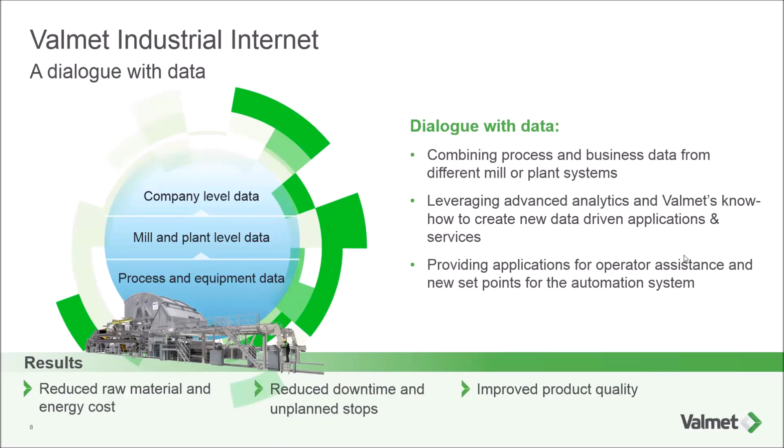So to reiterate in a nutshell, I'm going to be talking back to this quite a bit, but just because I think it's really important and it sets the tone for the whole presentation: the goal is we want to convert data into actionable information. That's the theme of what we are trying to do. Ward, could you move to the next slide, please?

So here I talk about the key elements of our industrial internet offering. At the core is the Valmet Performance Center. What this really is, I'm not sure how many of you have heard this term or seen the marketing material from us on the Performance Center. But really, it is a remote expert center where we provide remote support, remote monitoring, data analysis, and it also acts as a bridge between our Valmet customer experts, our Valmet process experts, and our customer experts.

As I mentioned, the theme of my presentation is converting data into actionable information. A key part of that is to give data context. So the next piece of our industrial internet offering is exactly that: the set of applications and suites we have built to give that data context.

Today, during the presentation, I'm going to focus on 3 specific applications. The goal is, as I mentioned earlier, we are using machine learning algorithms, which is a subset of AI, to build models to predict certain outcomes. I'll talk about that a little later on.

Another key component, to the right, is the Valmet Customer Portal. This is really a digital collaboration space between our customers and the Valmet experts. A lot of our applications and analytics, depending on the specific customer case, we may run in the cloud using Amazon Web Services. So essentially any customer with access to a web-enabled device has access to those applications and services through the Valmet Customer Portal. That's really the collaboration space.

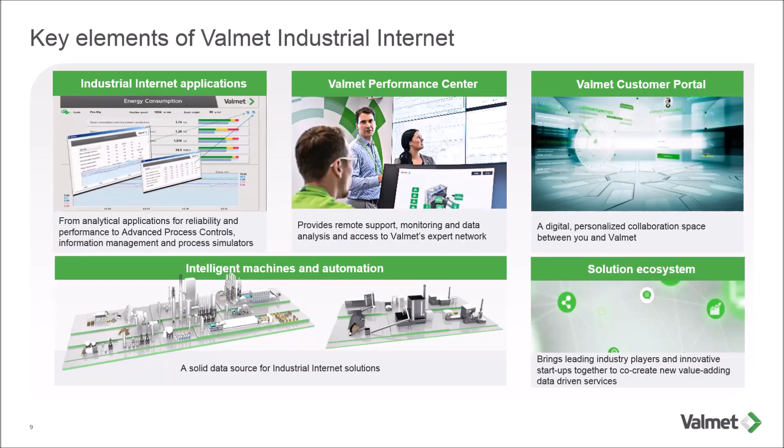All right, so this slide, before we get into the applications, provides a high-level view of some of the services and applications that we currently have for tissue producers. It can be broadly classified into 3 categories. To the left is advanced reporting and guidance. In the middle is the asset reliability piece, a set of applications and services focused on asset health and reliability optimization. Finally, to the right is the set of applications and services focused on operations performance optimization.

But all of these are underpinned by the Valmet Performance Center. As I mentioned earlier, the key here is we need to make sure we have a reliable data source and connectivity. Through the Performance Center, we can provide on-demand expert support, remote monitoring, and analytics.

Next slide, please. So here, for the presentation today, I'm going to focus on 3 specific applications for tissue producers, the ones highlighted in blue, and I'm going to focus on the performance optimization piece. We'll talk about the real-time quality predictor application, a break predictor, which is the runtime prediction application, and finally the centerline tool as well. Hopefully this is going to be interesting for you all, and everybody gets a little bit from this.

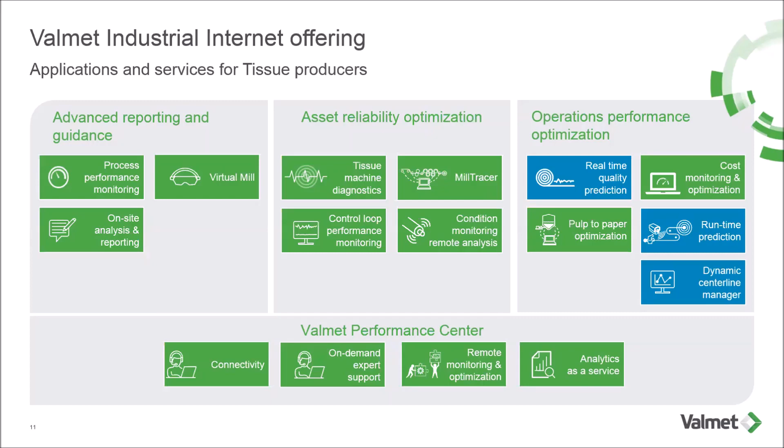Next slide, please. All right, so the first application I'm going to talk about is real-time quality prediction. The main focus here is to be able to provide customers, and specifically operators, with a real-time view as to what the quality parameters are doing.

In most cases, quality samples are taken once every hour, on the reel, or once every couple of hours, so operators can have to run blind. Our goal here is to deploy modeling tools that exist today to be able to provide a real-time prediction of what the quality is.

So for example, on a machine, we would take all of the data from the stock prep to the reel, which is a couple of thousand tags, could be even more. And we deploy machine learning algorithms to build a model using that data. Specifically, the outcome of the model is focused on certain quality parameters that we define together with the customer. The example I have on this slide is on a liner board machine.

But we've also done quality prediction on tissue for, in the examples I can talk about, CD MD tensile, stretch, caliper, and also bulk. In this example here, what you're looking at is the blue line is the measurement, and the red line on the top right corner trend is the model. You can see that the model tracks the lab measurements pretty well.

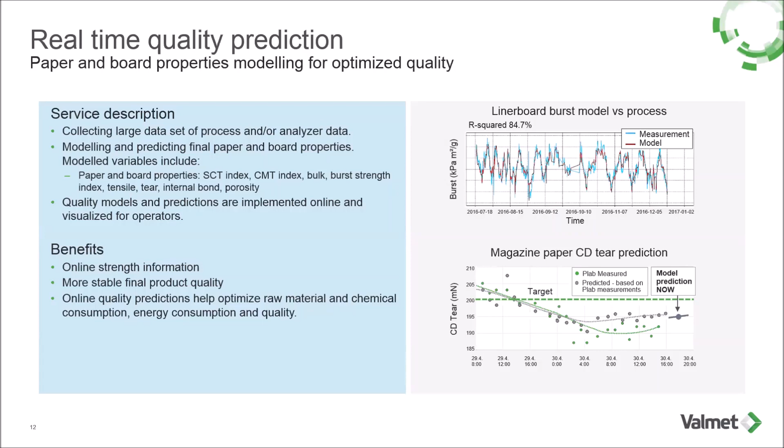So this is another example, on a tissue machine. The red dots represent the lab samples, and the blue represents the modeled value. Naturally, with just the discrete samples taken, there's quite a lot of variability. But with the real-time prediction, the goal is for the operators to run closer to the bottom end of the spec, represented by the green line on the trend, which directly translates into savings for the customer.

So this is just one example of how we are leveraging data analytics to predict quality in real time. And again, for most of these cases, the existing instrumentation, depending on the age of the machine, would be good enough. It's all about, like I mentioned earlier, converting the data that you already have, already archived, into actionable information.

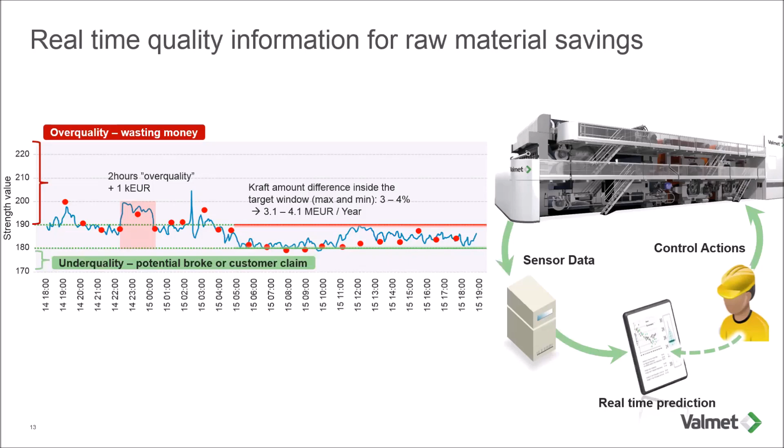So on this slide, I'm going to talk about the next application. This is a web break prediction application. The name is pretty descriptive. The goal here is to be able to predict a break early enough that the operators can then take corrective action. And we define early enough as at least about 45 minutes in advance of when a break occurs.

So again, the goal here is to take years worth of data, deploy our algorithms to train on, let's say, half of the data to build a model, and then to test the models on real-time data. Typically, for this kind of application, we are looking at a prediction accuracy, depending on the specific machine, varying between 20% and 45%. So significant potential, if the operators are able to reduce breaks by even 20%, or even going as high as 45%, that can be significant savings.

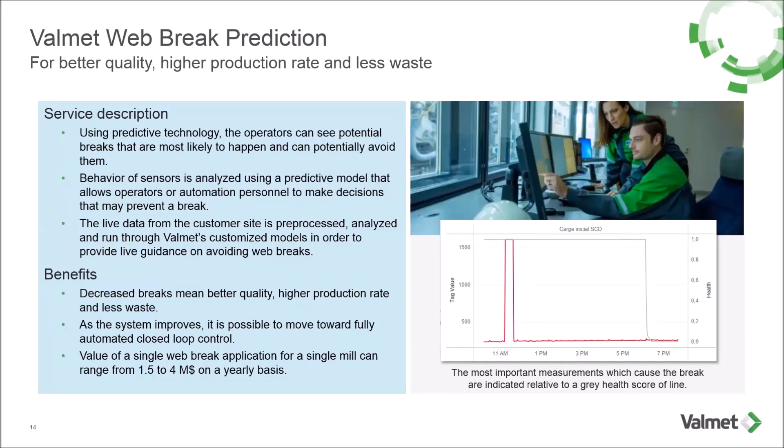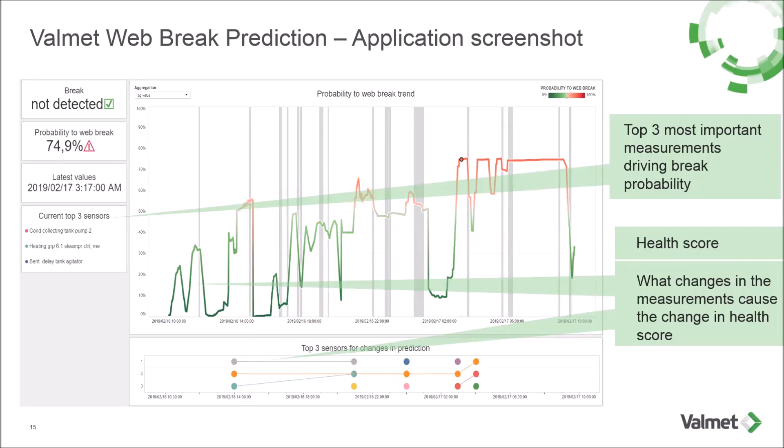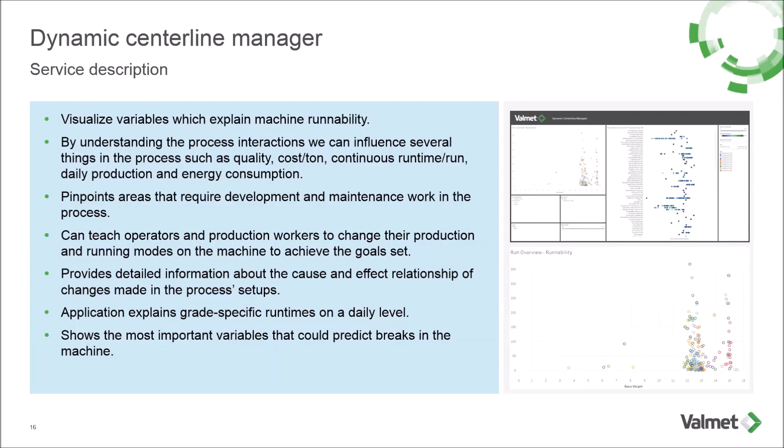So over here, this is an example of the centerline tool. Just to give a little bit of context, the challenge for customers, especially in North America and Western Europe, is that there's a lot of flux between experienced operators retiring, and how do you retain that knowledge and build tools that enable less experienced operators to get up to speed quicker. That's really where this particular tool is born from. We are basically building a guide for operators in terms of where the best potential places to run are, depending on the particular target parameters.

This is a summary of some of the activity in the industrial internet space from Valmet's perspective. This is a quick overview. We have 8 of these Valmet performance centers where we support our customers remotely with expert support and analytics from around the world. 5 are focused specifically on our customer segments, so that's pulp, paper, energy, tissue, and automation. And 3 are regional performance centers, one in North America, South America, and also China. We have a couple more in the pipeline for Asia Pacific and so on.

I work from the Atlanta Performance Center, and that's where I'm giving this presentation from. We have about 350 advanced process control installations, about 540 online connections with our customers, and 90 with performance agreements where we provide some additional value, insights, and performance improvement. The 46 number is an example of some of the activities in our performance center: 46 tickets we've closed with customers from 13 different countries, specifically just on board and paper. And again, we're constantly working with our customers to co-create applications and drive more data-driven analytics in terms of performance improvement.

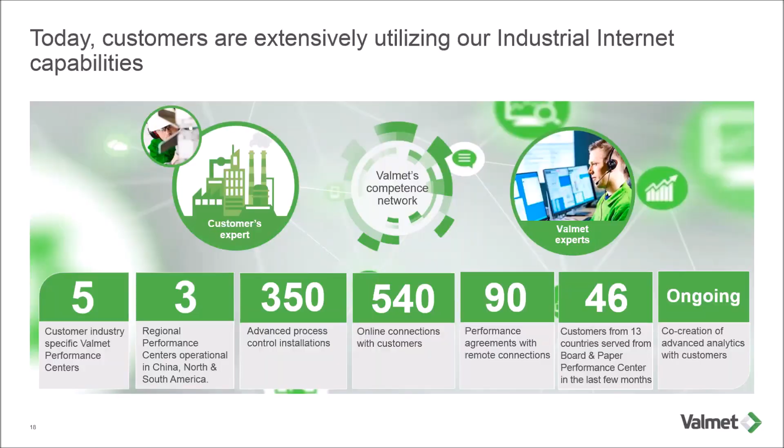So today I will talk about 3 new technologies here. It has actually been on the market for a while. For example, the first NTT machine started up in 2013.

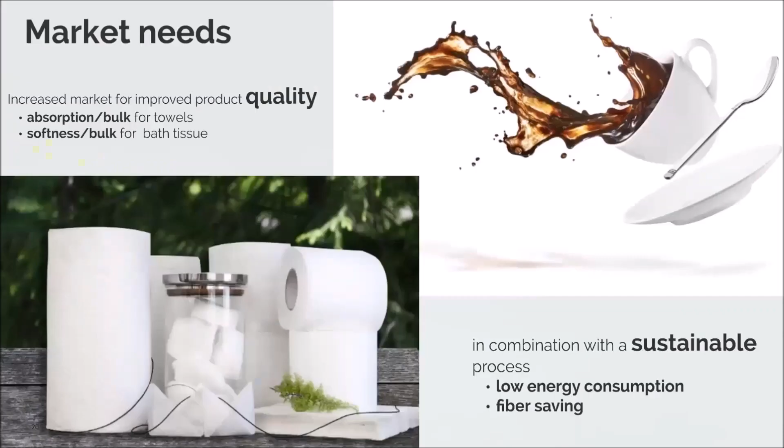The next slide is talking about the market needs, and there is always an increased demand for improved quality, and it will continue all the time. But then these hybrid, new concepts combine new product quality with very good energy consumption and also fiber usage. But it's not only about producing the paper at a low cost.

It is actually about how to use the fiber and the energy as low as possible for sustainability and environmental reasons. So the next slide, today we will talk about these three concepts in the center, this hybrid, and we developed these three different concepts based on the needs of quality. We also have swing capability, energy consumption, and then also production and efficiency. So I will walk you through these three hybrids: the NTT, QRT, and eTAD.

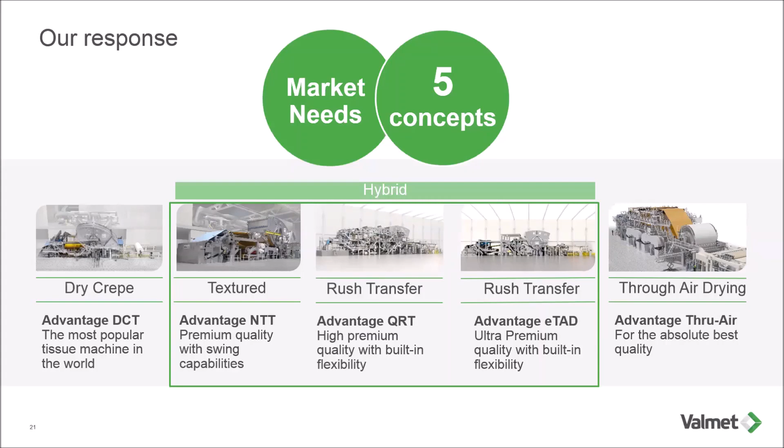So the next slide, the NTT there - if you look at that configuration and compare it to a conventional machine, you are adding another fabric, the NTT belt. What's zoomed in here in this rectangle is the heart of the NTT: it's the NTT belt together with this pre-press that we call the SymBelt press. That is a high loading element, 2 to 3 times higher than conventional pressing. That's why we are achieving extremely high dryness numbers and good energy efficiency.

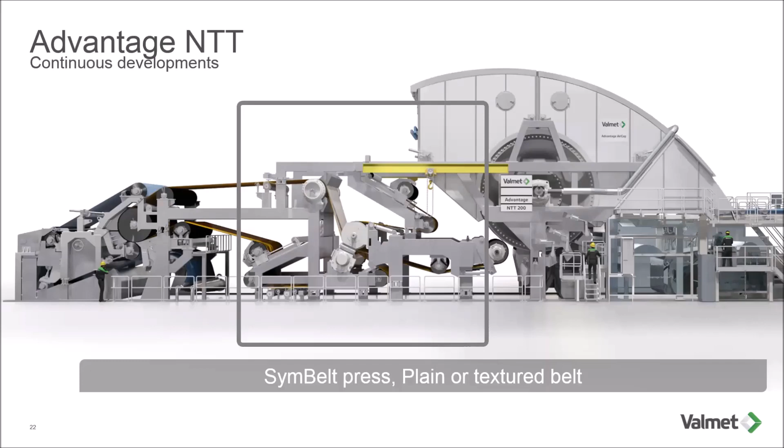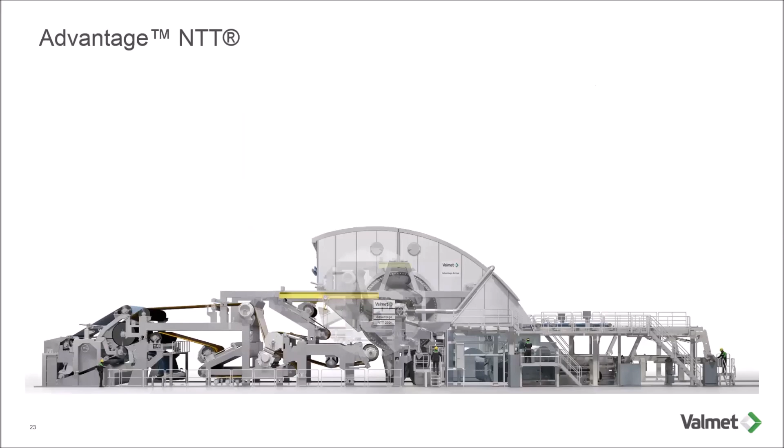But in this pre-press, we are transferring and creating the structure of the paper. So this 3-dimensional shape will be created in this pre-press. The next slide shows the principles there - you are transferring it from a felt over to this NTT belt. Talking a little bit more about the NTT belt, since we are creating the texturing of the belt by laser engraving, there are endless possibilities of different types of patterns.

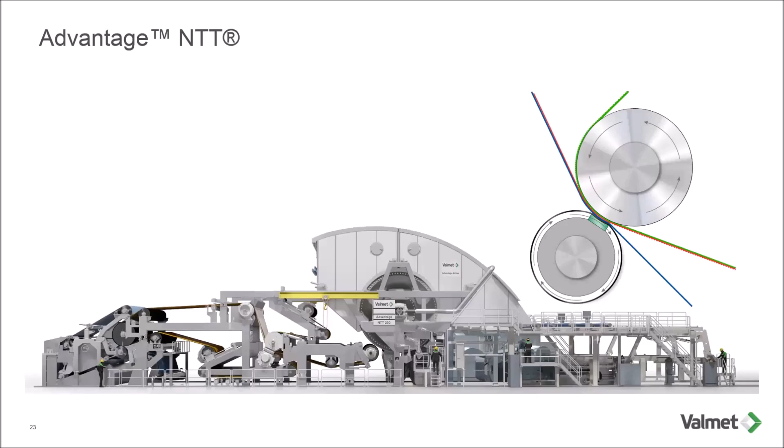Yes, that was only the NTT there. So next slide is really talking about the QRT. If you have the NTT in mind, what is the difference with the QRT then? It is that the QRT adds another type of clothing or fabric, a structured fabric after the NTT belt section, adding this rush transfer principle. So that's really the upgrade compared to the NTT type of machine.

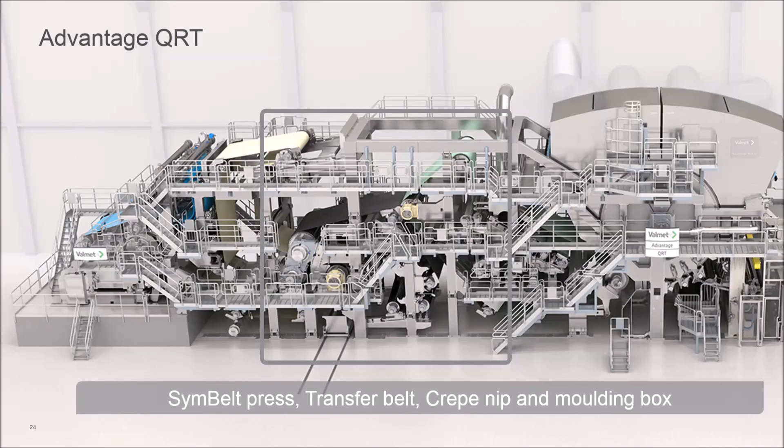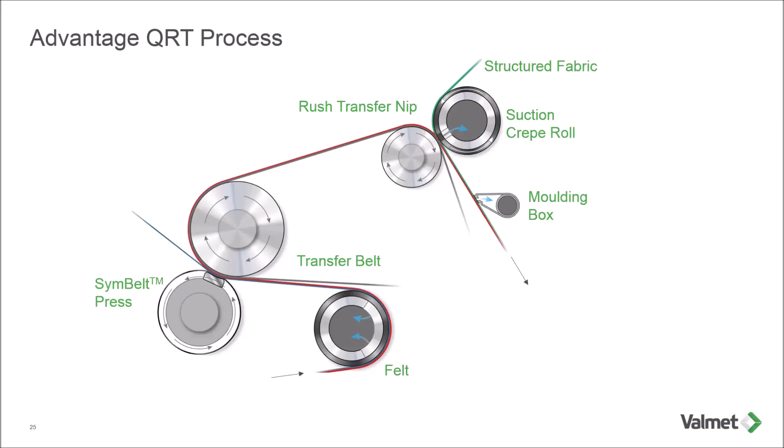Next slide shows the principles here, coming from the wet end. It's really a crescent former type of wet end. You make a pre-dewatering first with a vacuum suction roll, entering into this pre-press, SymBelt press, where you increase the dryness to a very high level, onto this transfer belt that is really the NTT belt. But the difference is this rush transfer nip, where we move over to rush transfer, and in the QRT we use a suction crepe roll, and then enhance it further with the moulding box. The next slide shows the principle there.

I'm not sure how easy it is to see, but anyway, the rush transfer principle is that it will slow down the speed or velocity of the sheet. So you are rushing it into this structured fabric to generate higher bulk.

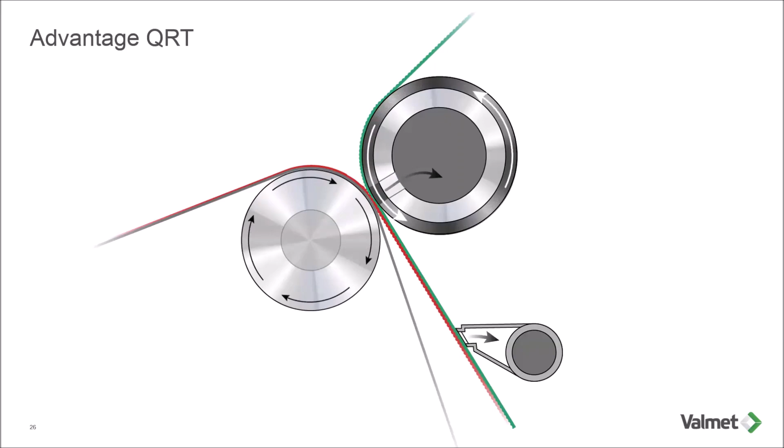That's really the QRT. Next slide shows the eTAD. What is this? There are a few similarities to the QRT - it has the same number of fabrics, and it also has a rush transfer. But the next slide perhaps shows the difference to the QRT.

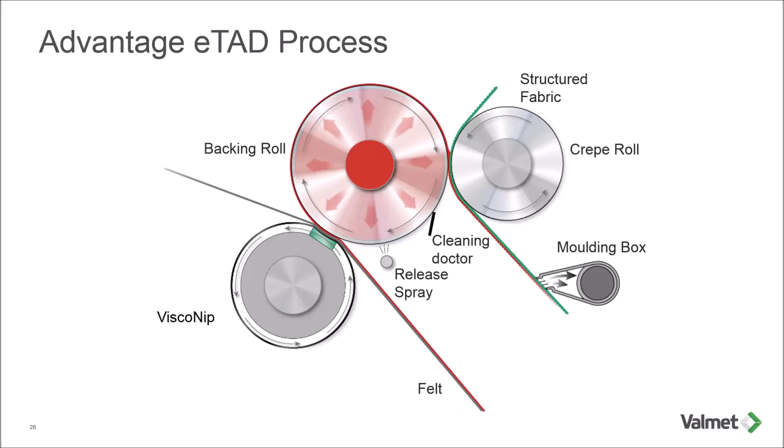The next slide also shows the principle here, how it's rotating there.

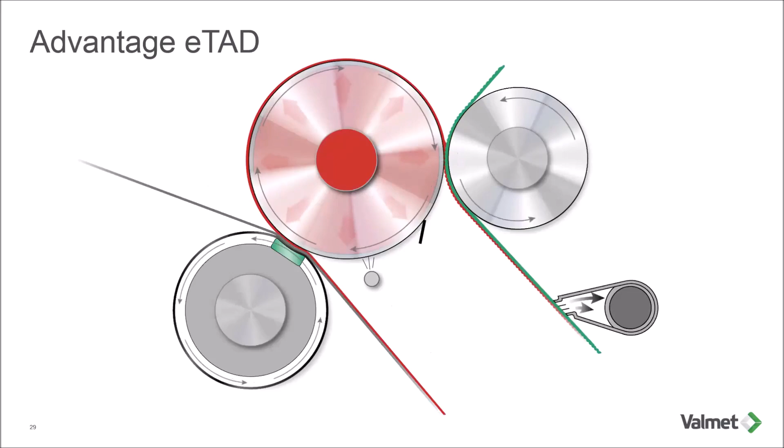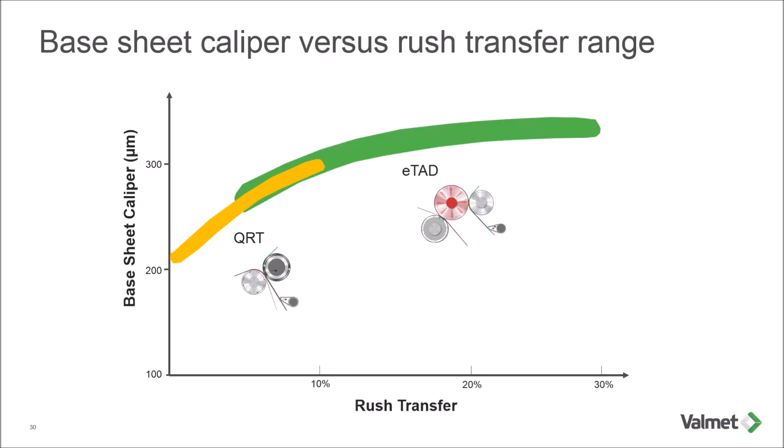Next, let's talk about the properties here. Perhaps the question is why we have different concepts that seem so close to each other. But this slide shows differences between the QRT and eTAD - you can do different rush transfers with the QRT versus eTAD. The QRT runs from 0 to 10%, and the eTAD runs in the higher range of rush transfer. So you can generate more bulk with the eTAD, but on the other hand, it will be more difficult to run the low rush transfers.

The summary is then trying to understand what the market demand is on the product quality you need, how much fiber and energy usage you are willing to use, and also we haven't talked very much about the swing capability between conventional type machines versus this structure. So it's a balance between those 3-4 aspects that you need to consider when choosing these technologies.

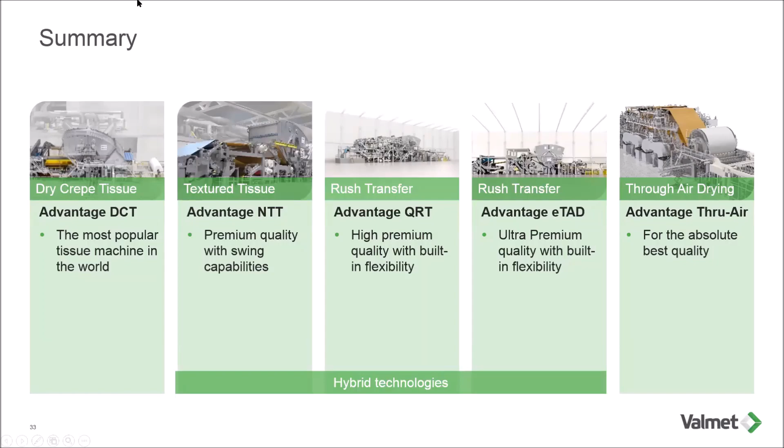So thank you very much. The next slide there is actually about being prepared for the future, and the future might surprise you there. Thank you very much.

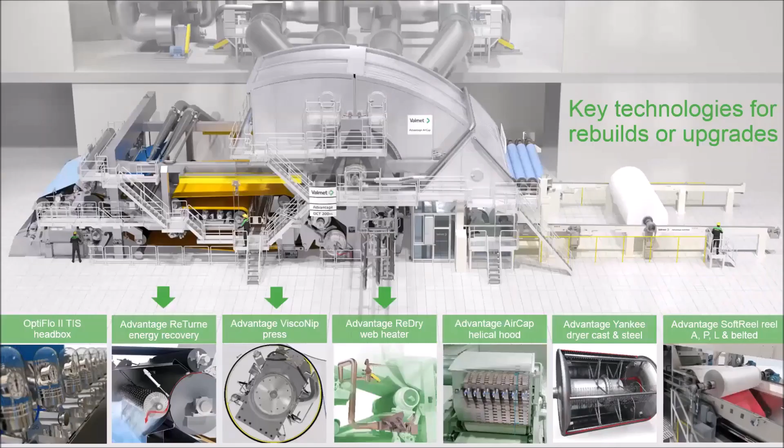Let's go to the next slide, Ward. So you can see there's a number of rebuild products and technologies that Valmet can offer to tissue makers. Today we're going to focus on 3 that have demonstrated significant energy savings, and thus enhance the sustainability of a tissue machine.

We'll look at ReTurne and ReDry a little bit later, but first let's look at ViscoNip, which is Valmet's latest extended nip press technology.

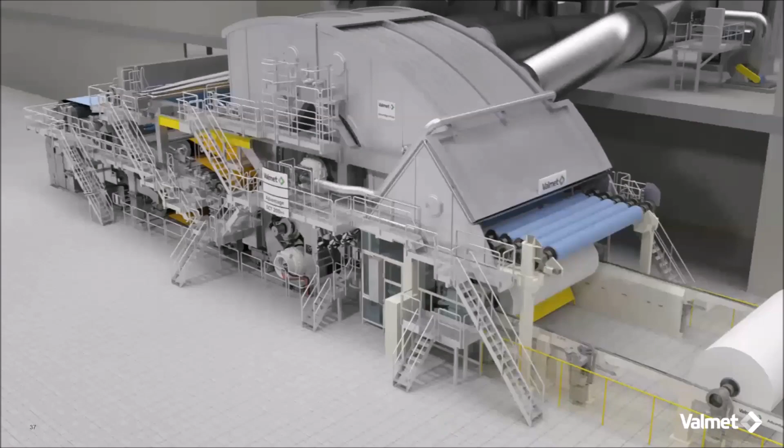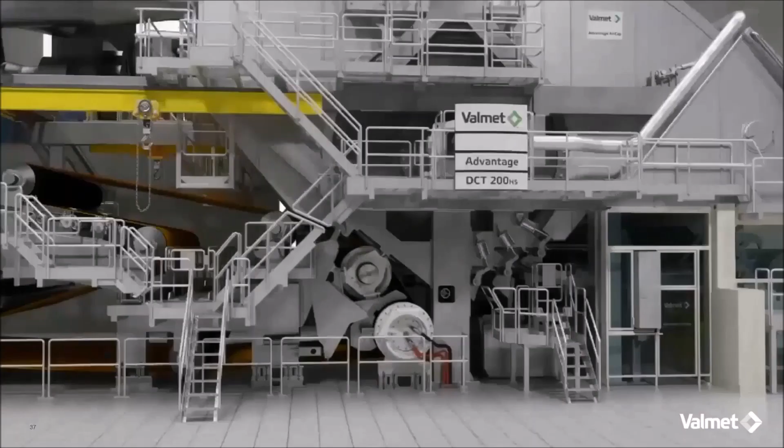Let's dive right into the heart of the tissue machine and look at the ViscoNip in section. The loading element differs from other extended nip presses in that it is flexible. It's made of polyurethane, and the two hydraulic chambers are how you develop the press load. As pressure is increased, the loading element deflects, providing the resulting load on the Yankee cylinder. This load can be easily changed both in overall magnitude and in relation to the relative pressure in each chamber. This pressure ratio is called the tilt ratio, and it determines the shape of the resulting nip pressure curve. This capability allows the tissue maker to operate the press in a variety of ways that improve overall dewatering and enhance product quality, all from a few DCS changes that happen in minutes.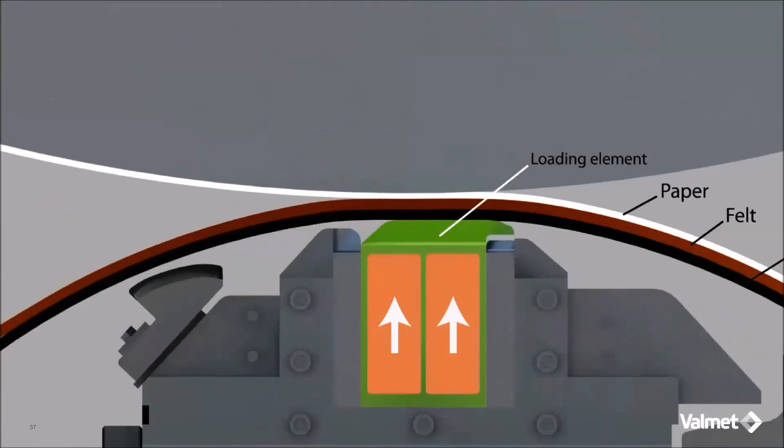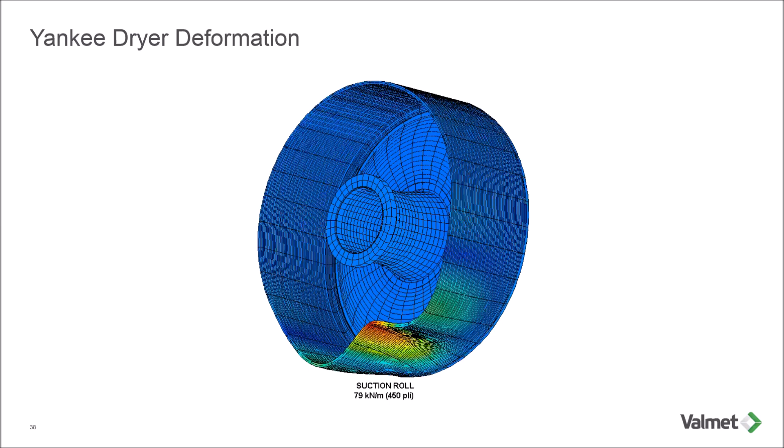When you design a press to nip against a Yankee dryer, it's important to understand how the Yankee dryer deforms. It's relatively stiff to bending, and most of the deformation is caused by shell deflection. The deformation is significant at the center of the Yankee but much less so at the edges due to the relative stiffness provided by the heads. The resulting deflected surface shape is complex, and it can be difficult to match with a roll press or traditional shoe press with rigid loading elements. The ViscoNip press has been developed to maintain a uniform press load even though the deformation of the Yankee shell is complex, by having a flexible polyurethane loading element that adapts very well to the deflection of the Yankee shell.

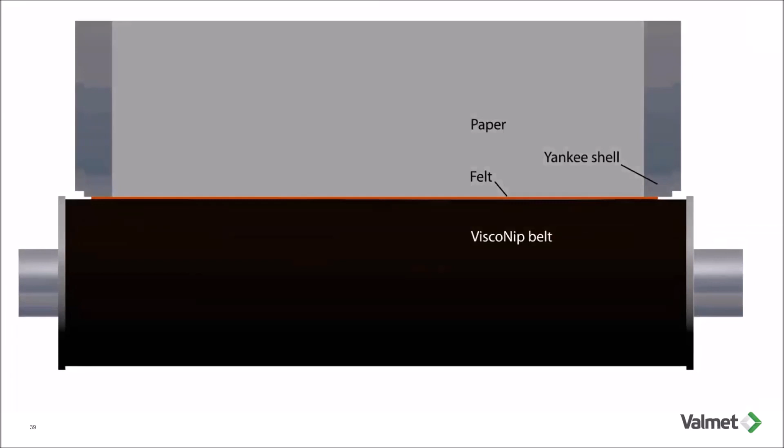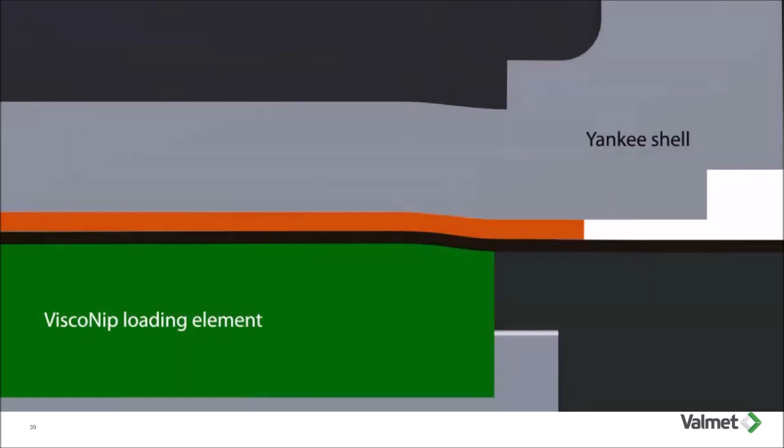Let's look more closely at the specific issue and how the ViscoNip solves it. If you look at the Yankee and ViscoNip in section in this animation, you can see how the flexible loading element can effectively and evenly conform to the deflection of the Yankee, both at the center and at the relatively stiff edges. This results in a very even loading across the machine at any operating condition of the press and Yankee system. No longer do detailed and specific crown calculations determine how you operate the tissue machine. ViscoNip gives you the ability to operate the press in an almost infinite number of ways.

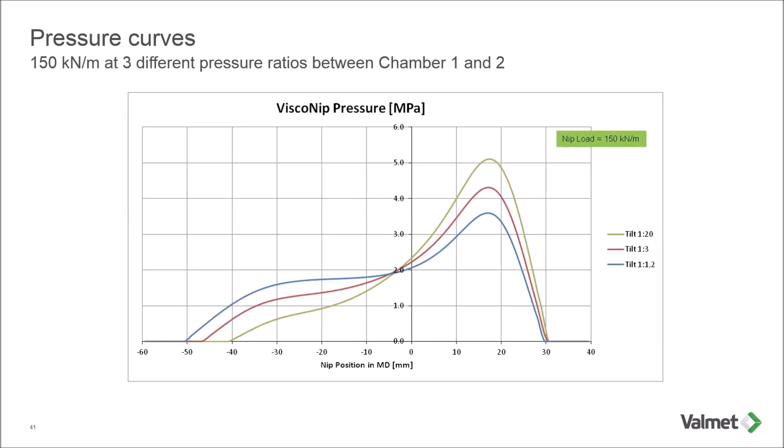Or you can increase the overall load and still operate the press at different tilt ratios. This loading strategy would be useful in generating the highest press solids and thereby reducing overall drying load. And let's not forget that these changes are achievable in a matter of minutes with only a set point change in the control system.

ViscoNip offers a number of benefits over roll presses and traditional shoe presses. The first of these is energy savings. Press solids content of up to 47% has been demonstrated in a number of references, both with virgin fiber and with recycled fibers. Since a 1% increase in press solids typically reduces drying load by 4%, this can significantly reduce overall energy consumption of the tissue machine.

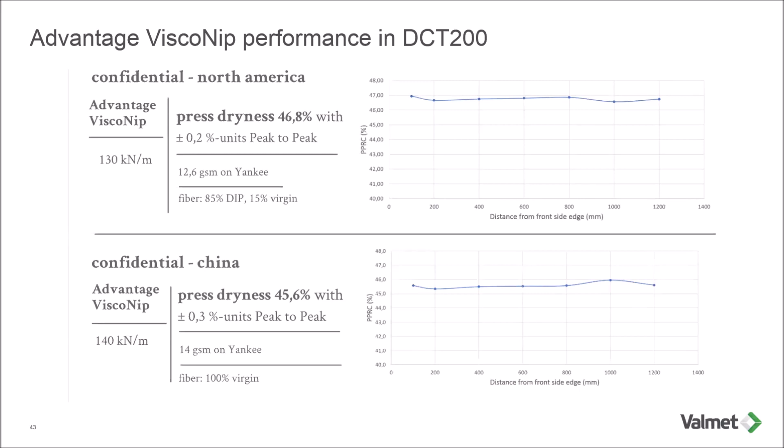The second key benefit of ViscoNip pressing relates to the uniformity that is achievable with this technology. By being able to adapt very well and press evenly across the machine, even at the edges, ViscoNip gives a very even moisture profile. That means the sheet is evenly transferred to the Yankee, evenly dried, and then evenly creped. This results in a better sheet at the reel and onwards into converting operations. In some rebuilds, this has allowed the tissue maker to remove the steam profiling shower and its associated steam use. The CD profile no longer needs to be corrected with a profiling device.

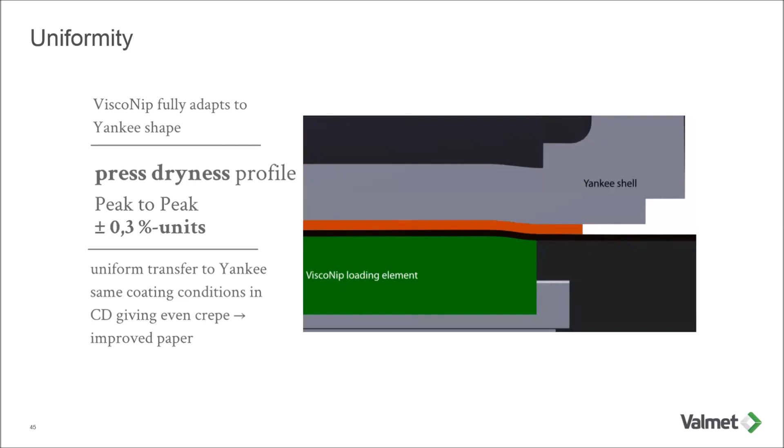And then the final benefit relates to the flexibility that the tissue maker now has in how they run their machine. As I mentioned earlier, crown calculations are not needed due to the flexible loading element, so no longer does a specific set of conditions dictate the press operation. The tissue maker is free to operate the press and machine in different ways depending on the end result they're looking for.

For maximum energy efficiency, you would seek the highest nip load and specific nip pressure. And to retain bulk, the press load would be relaxed and the tilt ratio would be lowered. So depending on production needs, the pressing conditions can be changed quickly to produce the desired effect. This ability to easily and quickly change the machine means the production line can be more responsive to market demands, making it more valuable within the organization, either as a single machine or as a way to provide overall manufacturing flexibility within a corporation's fleet of machines. Being efficient, flexible, adaptable to change—these are all pillars of overall manufacturing sustainability.

So let's look at another technology that also helps in this regard.

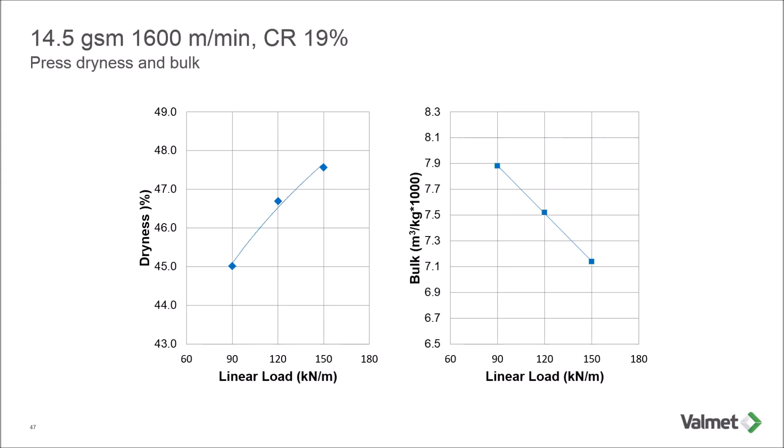Next slide, please. This technology is called ReDry. So if we go to the next slide and look again at the press section of the tissue machine, there's always been a need to improve dewatering at the press specifically. The previous technology we looked at also had this as one focus area, and ReDry does as well. Anytime you can raise the temperature of the sheet at the press, you dewater more effectively due to the reduced viscosity of the water in the web.

That effect is commonly achieved today with a steam shower. But in order to do that, a steam box consumes steam and contributes to the manufacturing cost as a result. ReDry can give the same effect but with less cost because the heating source is not live steam, but rather the Yankee hood exhaust air. So in practice, you can get the same or better benefit without the operating cost.

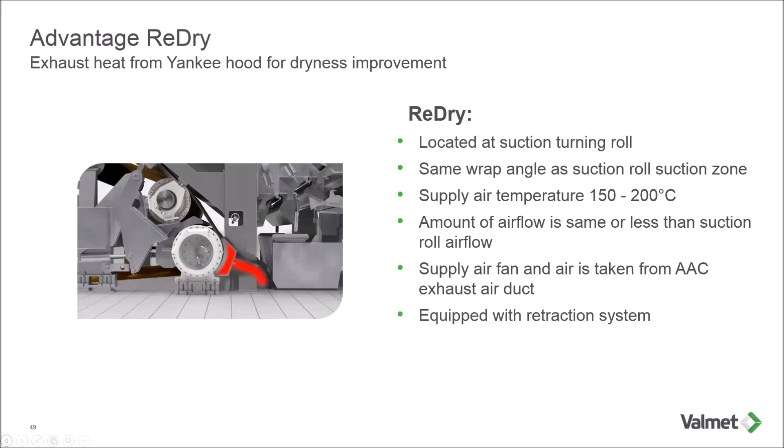Next slide. From a practical perspective, this rebuild is fairly straightforward. Can you advance the slide, please, Ward? Thank you. The ReDry component is installed in the press section, either on the suction pressure roll or on the vacuum dewatering roll of a visco-nip machine.

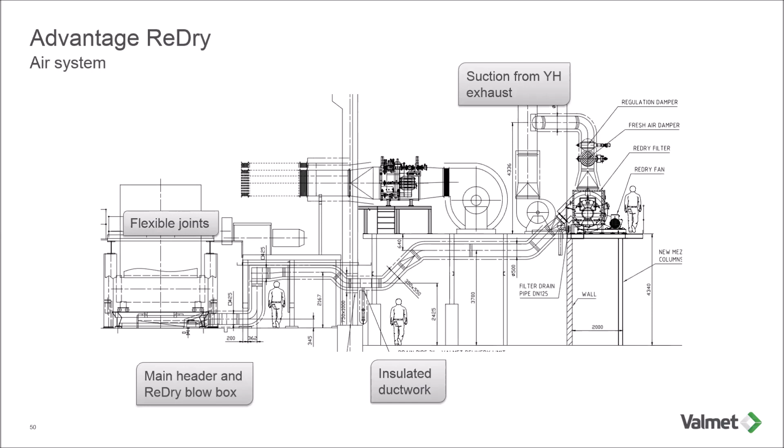The air system is installed on the mezzanine and it draws the Yankee hood exhaust into a fan that supplies it to the blow box on the machine. Temperature is controlled by bleeding in relatively cool mezzanine air, and the overall flow to the blow box is kept lower than the exhaust flow from the roll. This is done to ensure the blow box does not blow hot air into the machine room at the press. In a rebuild, the majority of the installation work can be done without stopping the machine, but installation of the blow box and the final duct connections would be done during a short outage. Next slide.

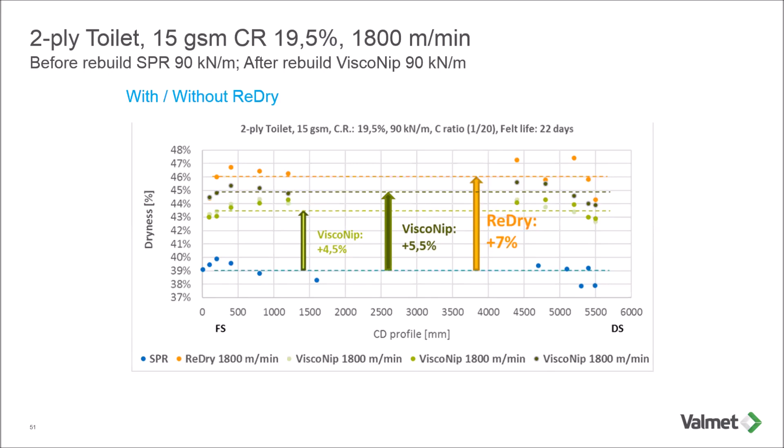Next slide. One other aspect of this improvement should also be mentioned. Because ReDry saves energy and due to visco-nip's operational flexibility, this combination allows the tissue maker to further reduce press load and build more bulk. This effect can then be translated into higher quality tissue at the reel. So the combined effect of a visco-nip and ReDry rebuild truly is a winning combination in many ways.

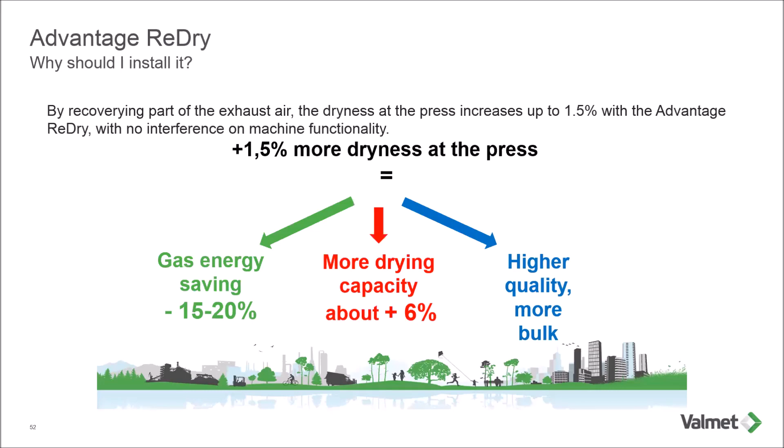Okay, let's go to the next slide. Our final rebuild opportunity shifts from the press section to the wet end of the tissue machine. ReTurne is an energy savings tool that captures the headbox jet's kinetic energy and turns that into electricity for the tissue machine drives. It was developed when a simple idea about how to handle water in the wet end sparked us to ask the question: why is this energy wasted instead of used? And really, the idea and the solution are quite simple.

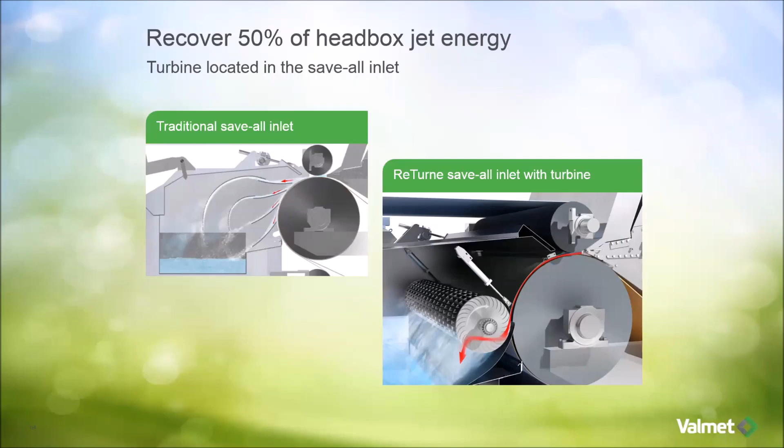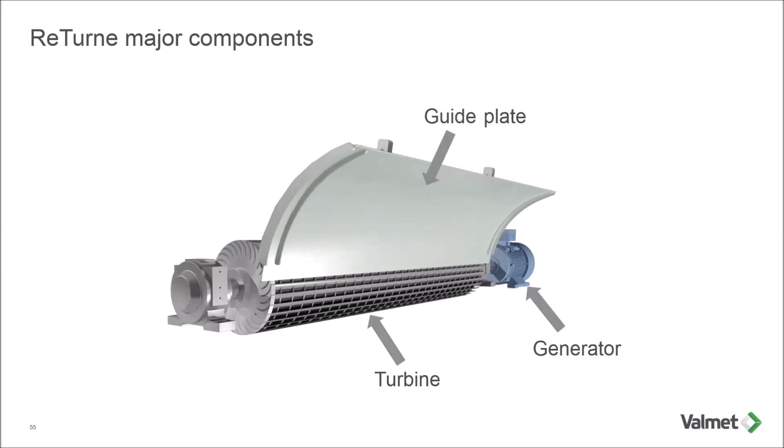There are three main elements to ReTurne. The guide plate directs the water that is passed through the forming wire. The turbine is used to transform the kinetic energy of the water into rotational energy, and the generator changes this rotation into electrical energy.

When the system operates in recovery mode, the water from the jet is directed by the guide plate to the inlet of the turbine. After the energy is recovered, the water is released from the turbine into the save-all and then is directed to the flume.

If there's a need to stop the turbine for maintenance, a mechanism is used to move the guide plate closer to the forming roll, and this directs the water past the turbine. This ensures that the tissue machine can continue to run without interruption in either recovery or bypass modes.

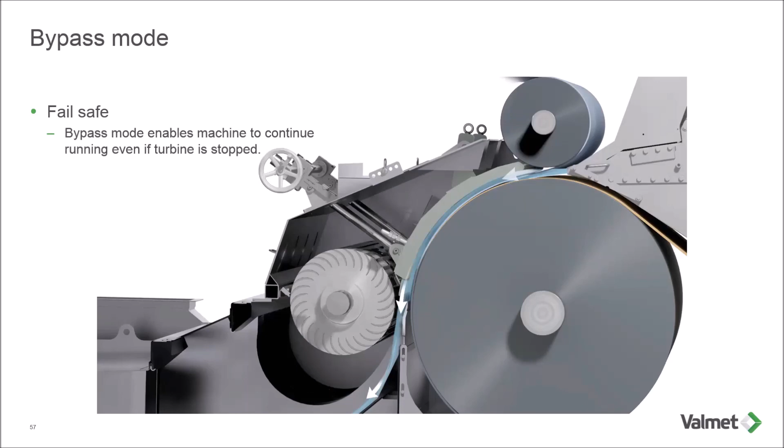The generated electricity is directed to the drives of the tissue machine, and this dramatically reduces the resulting demand on the electrical grid. In references that are installed and running, it is quite common to capture 50% of the headbox kinetic energy, and depending on the operating conditions of the machine, the resulting savings in electricity can be as high as several hundred kilowatts.

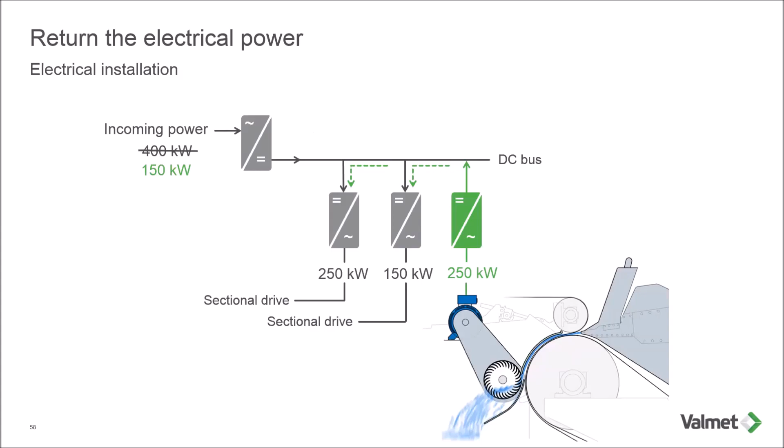So return clearly is a rebuild opportunity for all Valmet DCT machines as well as other machines. The best way to look further into this sustainable rebuild opportunity, as well as the other technologies that we reviewed today, is to contact Valmet and review the specific details of the machine in question.

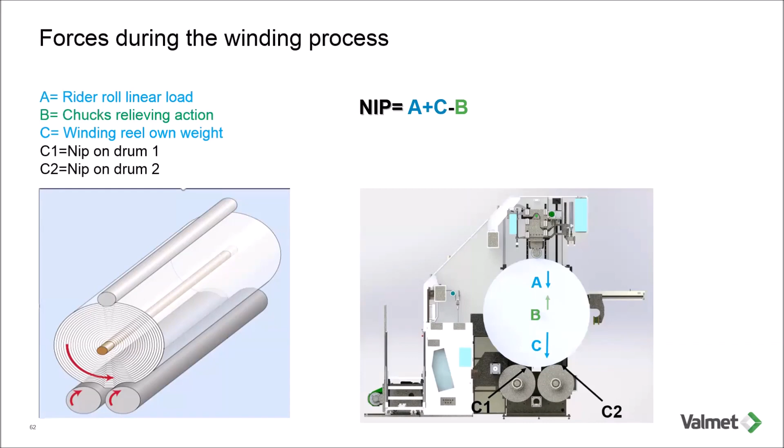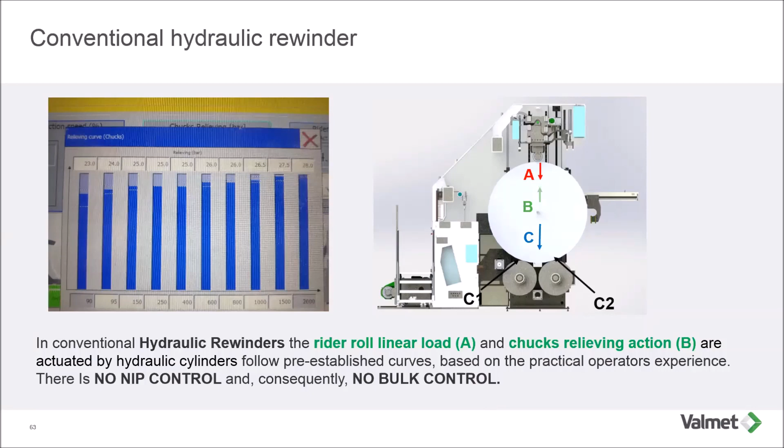With the conventional technology, the rider roll linear load and chuck's relieving action are actuated by a hydraulic cylinder, according to pre-established curves based on practical operation experience, and in this condition there is no control of the bulk.

During the rewinder process, the bulk is the most important parameter to preserve in order to keep as much as possible the original characteristics of the mother reel. Currently, Valmet is the only rewinder available in the market that can prove a bulk loss below 3%.

So let's introduce our Focus concept. The heart of this technology is our patented ACC, Active Caliper Control, a closed-loop control with feedback from load cells mounted on the rider roll and chucks. The ACC permits an effective control, keeping consistent the nip of the winding reel on the carrying drums during the process at any speed.

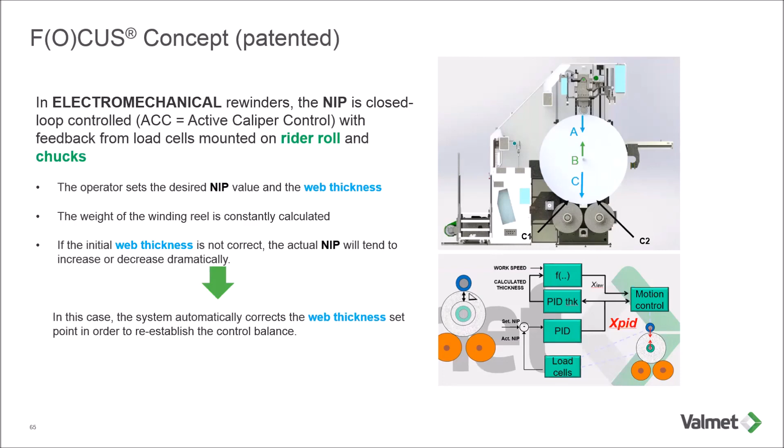With Valmet Focus E and ENS model tissue rewinders, the operator simply needs, before starting production, to set the desired nip value and the web thickness. The rewinder will calculate automatically all the other parameters according to the production plan, and in case the initial web thickness data set is not correct, the system automatically adjusts the web thickness set point in order to re-establish the control balance.

The process is carefully controlled not only electronically, but also through our electromechanical technology. Chuck's relieving and rider roll pressure are actuated by a precision ball circulation screw. Advantages are clearly described: precision, clean operation, and lower and easier maintenance.

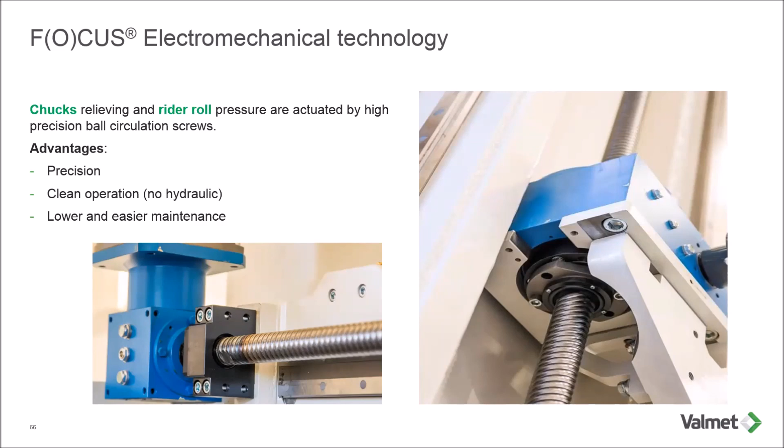As I mentioned before, our main purpose is to maintain the original characteristics of the rewinded paper, as in the original mother reel. In the ENS models, the typical Focus electromechanical relieving approach has been implemented with a complete automatic system, no-stress, that permits moving the finished reels with very smooth operation through our electro-actuated shuttle. The second benefit of this application is the perfect alignment of the finished reel and the shaft puller. The design of this solution also permits easy access to carrying drums for cleaning and maintenance.

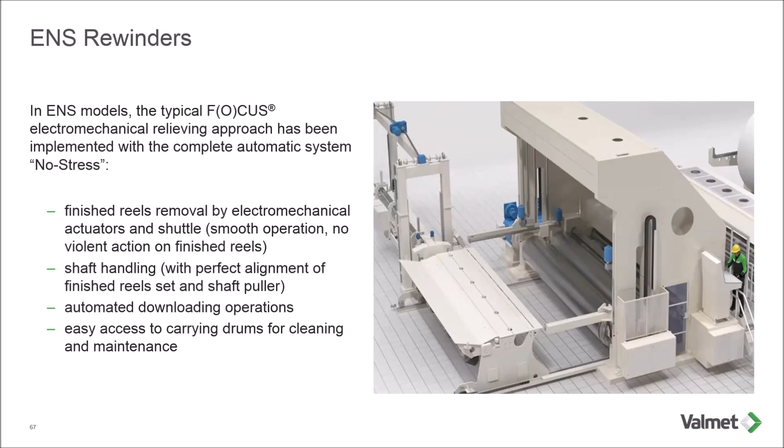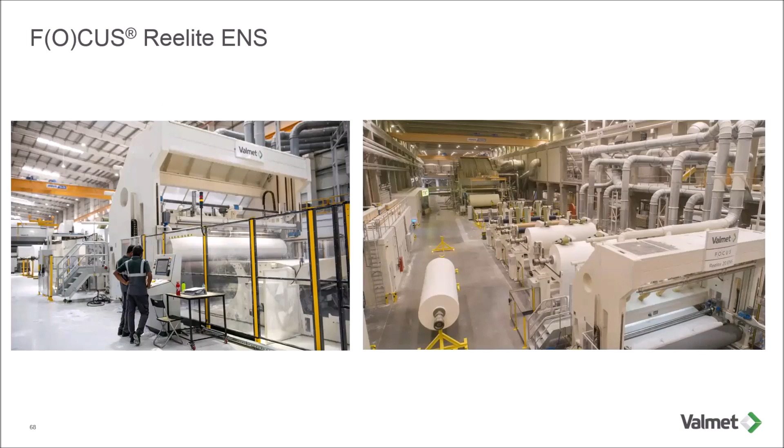Here you can see a couple of pictures of our F(O)CUS Reelite ENS installed in line with the tissue machine.

Traditional technology is also available in our production range. The particular design of our line Series T permits, with specific adjunct kits, to update the supplied line from basic hydraulic shaftless to hydraulic shafted, and furthermore from hydraulic shafted to our top technology, electromechanical with bulk control.

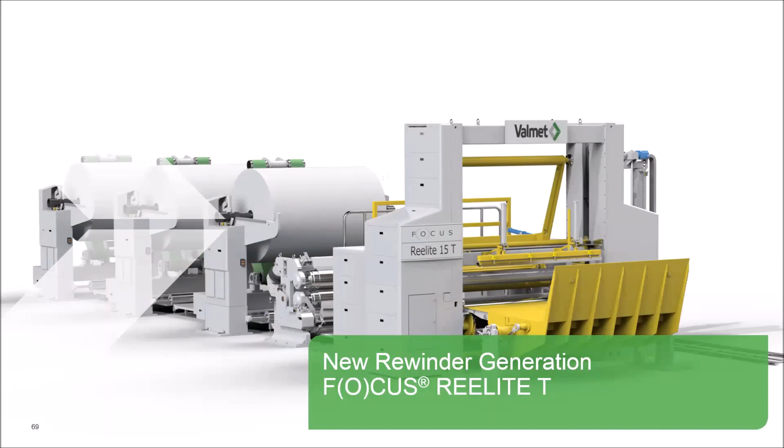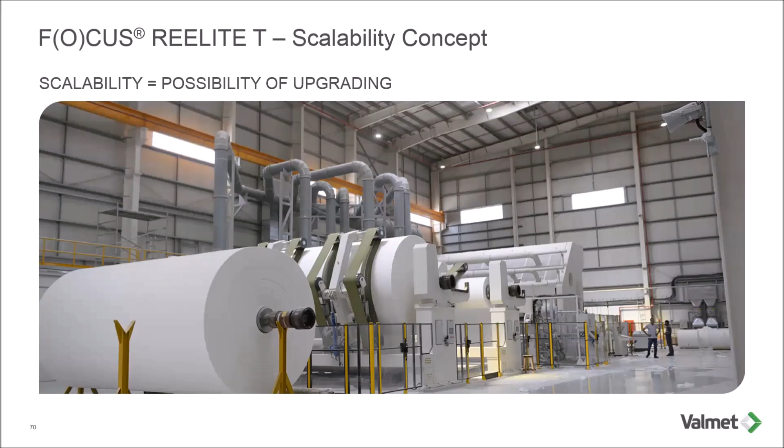We apply to our Reelite Series T a scalability concept. T means transformable.

From the initial basic supply hydraulic shaftless, there are two extra steps of modification available to improve not only the performance in terms of speed and production capacity, but also in terms of enhanced quality by bulk control with our mechanical technology.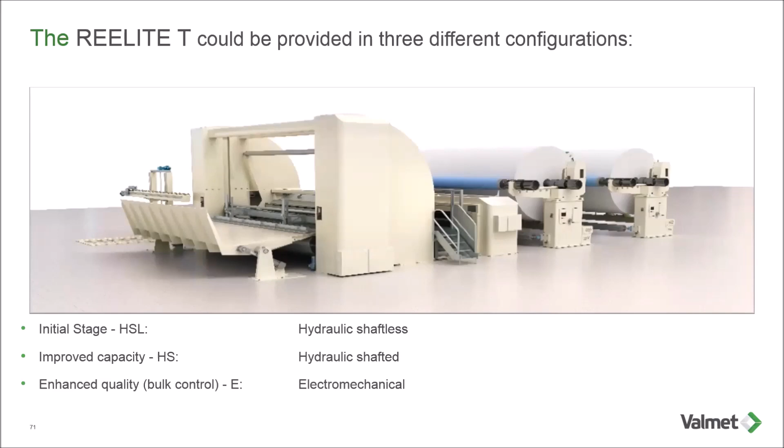To summarize our scalability concept: customers, over time and according to production needs, could upgrade the existing line in performance and quality starting from the basic configuration.

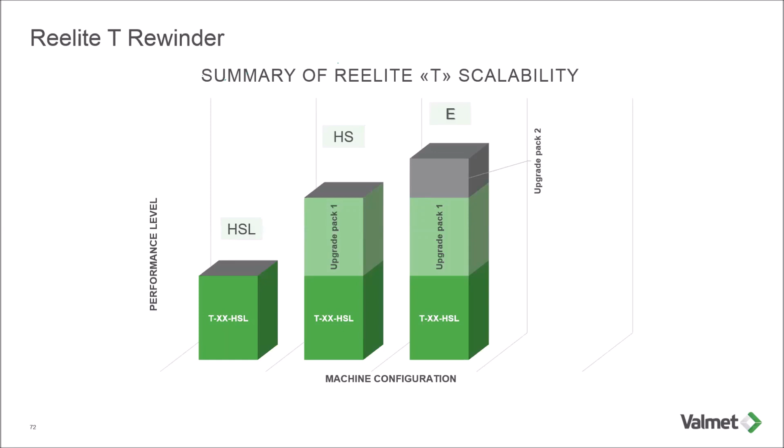In conclusion, a brief consideration. Since we started introducing our electromechanical line with bulk control into the market, the number of electromechanical lines put in operation is by far more than the traditional hydraulic type. And in many cases, these are repeated orders, clearly showing the appreciation of this technology.

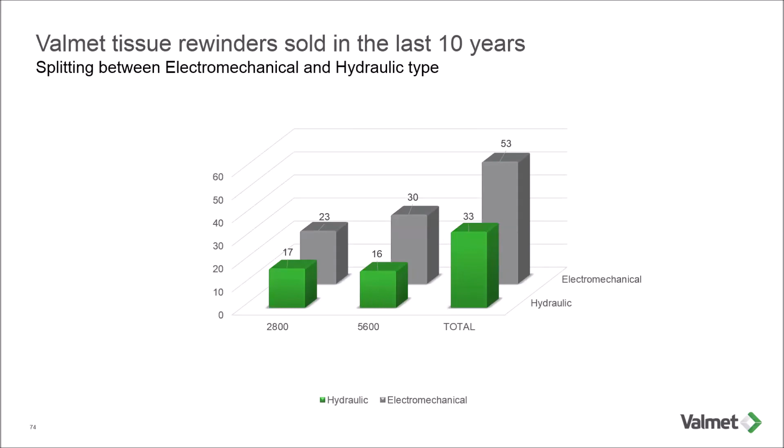Thank you very much for your kind attention.

Thank you, Andrea. And now we have a lot of questions that have been coming in. First, David, were there any questions directed to you that you would like to answer now? Yeah, Ward, can you hear me? Yes. Okay, fantastic. So I see a question from Jin Hyun.

Thank you for the question. It's quite a detailed question, so I'll try to condense it a little and give a general answer to the group. Essentially, the question was around the fact that when we do quality prediction, and even in some cases root cause analysis, there are quite a lot of variables that can have an impact. So how do we know which variables we're looking at, or which variables we should be focusing on? That's an excellent question.

It is extremely challenging, because you're right. I'll give you an example. One of the cases we worked on, we had about 6,000 tags, and when we did the first pass at data discovery, our data scientists found statistical correlations for about 2,000 tags that were affecting the output. So it's almost impossible to provide insights